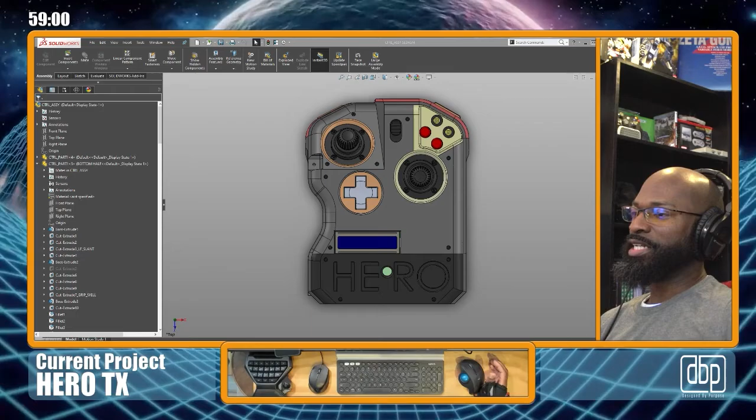Yep, so I'm back at it again. I did some more work over the weekend. Just so you know, if this is your first time, I am an engineer, and I am creating my own custom radio for robotics, remote control projects, whatnot. It's my hero radio, so it'll be at least my first version of the hero radio, and it'll be used for a whole lot of things. So the main thing is that I get it built and that I get it in service so that I can actually continue on these other projects.

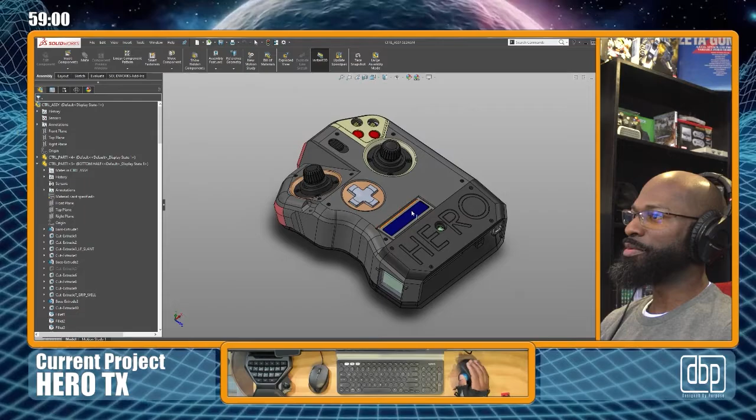So over the weekend, where I left off from my last stream, I asked if you can see some of the differences that I've done since the last stream from Friday. Can you spot the differences? If you cannot, I'll point some of them out. I added the bottom plate, the bottom faceplate.

Oh yeah, a couple differences I forgot. Actually, there's quite a few things I changed or added. So I added the bottom faceplate on here, and you can see I've typed in the first version of my hero, just some hero text. I originally was going to put it up here, and I may still do that, but I didn't put those screws in there. I need to move these. I think I'm going to move these holes out to the sides instead of being in line with these holes. But originally I was going to put hero up here. I may still do that.

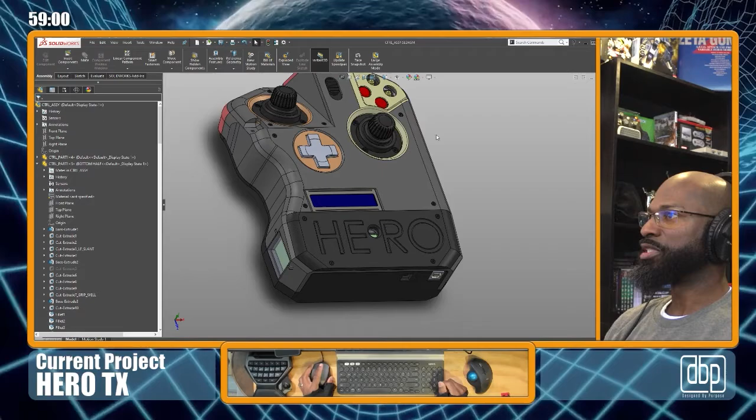But I had all this blank empty space down here that just nothing was happening. So I wanted to put something to kind of break up that emptiness. So, excuse me, I added the text there. So far I'm pretty happy with it. I'm interested to see how it's going to look when it's actually printed. Of course, I can turn off these lines to try to get a little bit of a feel for how it's going to look. So, something along those lines.

Okay, so I have that. What else? Let's go. I added, let's put this back on here. I actually added some screws to the top just so I can start getting a feel for how that's going to look. I'm going to use M2 screws. Originally I was using 4-40s.

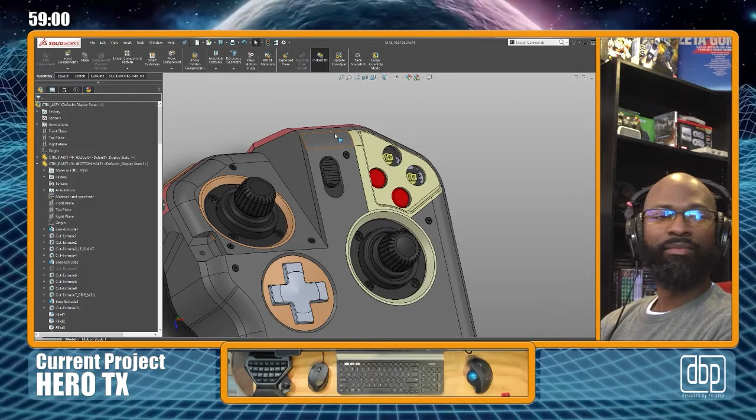I had planned on using 4-40 screws, but because the inserts, the press-fit heated inserts—I don't know what you would call them—were mostly available in metric sizes, I opted to change everything over to metric screws. So I have the heated inserts, and I have the screws already here. So I decided to go with the M2.

I figured they're quite small, and it's not like this is load bearing. These face plates aren't load bearing, so to speak. They just need to be on there. So I thought the M2 would be unobtrusive. I already bought them, so they're black oxide, the dark color. Check, yep, they're black oxide.

I thought about it briefly. I was like, well, maybe I could do just the chrome or the stainless steel look, but I think I want to go with the black oxide. I think I want to keep them black.

So we have that. I went and popped some holes in so you can see the ports on the Arduino Mega. So that's cool.

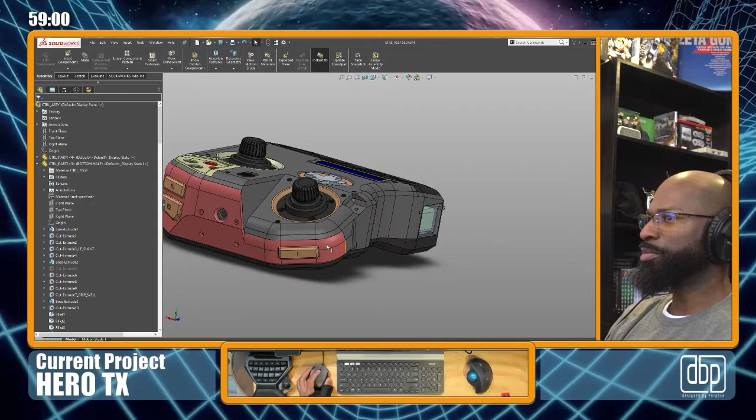What else? I pretty much finalized the buttons, the bumper buttons up here. Well, I shouldn't say finalized, but I made progress. So I scooted them over. I centered them within this face.

I also added a little bit more substantial flange in the back, so it doesn't have just that see-through gap where debris could go into the radio. It is open. There is a little space on this side. I'm still trying to figure out exactly how I want to deal with that.

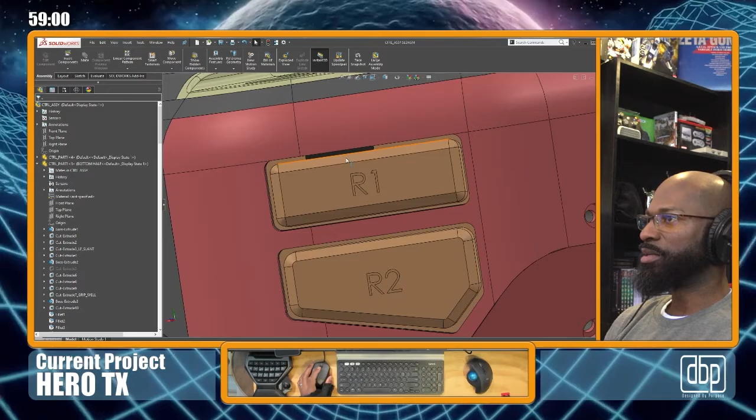But right now, this is what I've done. So this one also has a flange. The flange encompasses more, it fills in that gap. Same thing here. This is actually a button that's out of place, so you can see how that goes now.

I did say that I was going to keep this lip. Originally I was going to get rid of it, but I'm going to keep it kind of as a finger guide. So I think I'll leave that there.

That's no problem. So I'm supposed to be working on this battery box and getting this finalized. I'm still, in my mind, working through it. I do know that I'm probably going to turn this up on its side instead of having it lay flat. So I can do that real quick.

Because I'm more than likely, for the battery box, I was trying to see if there's any mates. There's no mates. I'm more than likely going to make an insert that goes into this area that's going to intrude upon the top main body and the bottom second portion.

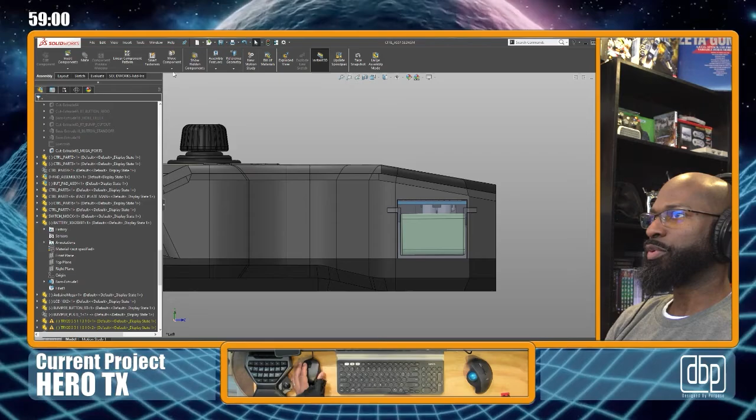So it's going to be a separate 3D printed part. I'm not sure if I'll change colors or not. I may think of it more like a window frame. So I may keep it in the same color, print out of the same material, and then make the actual door or box out of a different material.

Uh-oh, it stopped moving for a second. Let's see here.

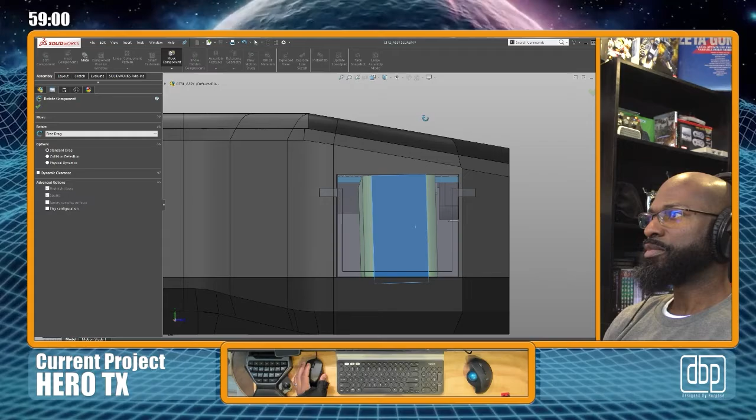All right, let's bring this down a little bit. I don't know, maybe I'm having some memory issues or something, because my Solidworks keeps slowing down a little bit.

But like I said, I have a lot going on. I'm streaming, I'm recording. So let's try to get this. All right.

So I'm probably going to leave it in that configuration, or orientation is the better word to use. Let me close this.

Let me turn this transparency back on. So this door will be... I might just turn it back off. Make it transparent. So that door is going to be reconfigured.

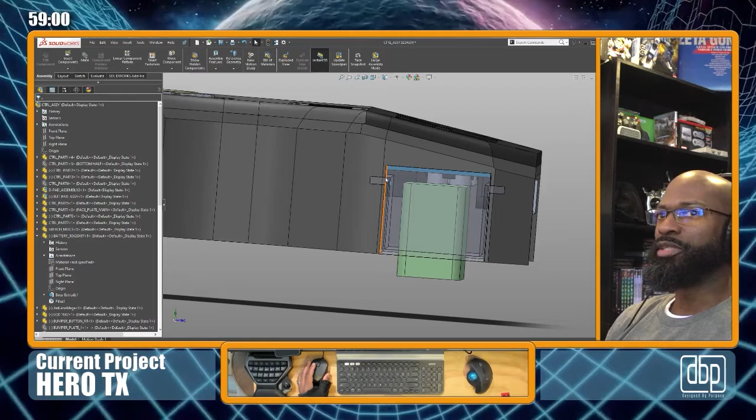So to recap on this, I'm going to make a window frame, a door frame. There's a separate piece that will be mated and glued into the first main body. I'll do that, and then the actual battery holder itself will mate with that window piece.

That's what I'm thinking. That window piece will extend down. It'll be glued on the top portion. It will just be some kind of mating surface, a mating frame on the bottom portion that the bottom piece can go into.

So that's what I have in mind right now. We'll see if that changes anymore between now and actual implementation.

All right, with that being said, today I want to actually make a part, at least make a stand-in for a particular part. Let me show it to you. Let me show you the part.

And then we'll, where's my magic notebook? Oh no, I didn't bring it around. Uh-oh. Delinquent. Let me show you the part while I go get the magic notebook. All right, I'll be right back.

Turns out I didn't have to go far at all. The magic notebook was right around the corner.

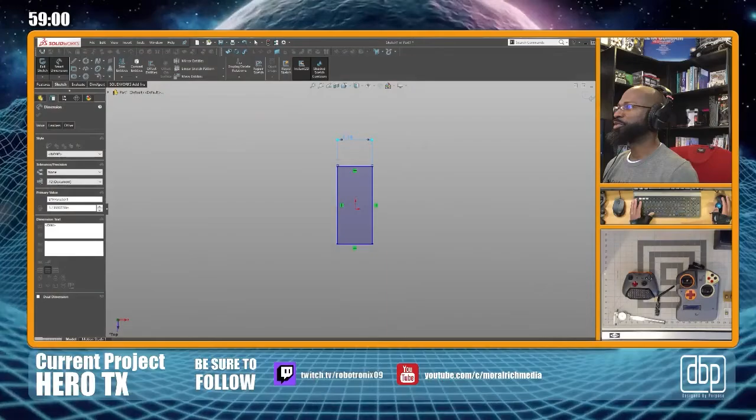So this is 0.6. Oh, got to remember to switch my view. All right, so we're back. This is 0.6 wide, and then it's going to be 1.6 in length. I don't know why there's a delay, probably because I'm running so much in the background. All right, let's just go ahead and center this thing up. Midpoint, and select our little... there we go. Bam, that's cool, all right.

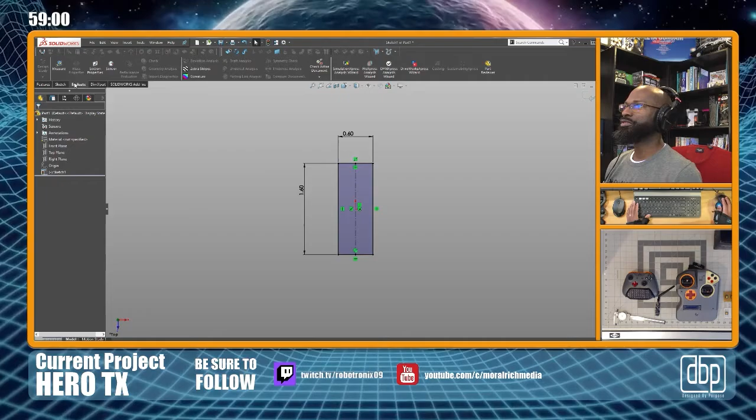So now let's just go and extrude. Oops. And we said, oh, I said 0.4. So I'm going to do midpoint, which I always do, 0.4. So we got our little wafer PCB board.

I'm actually going to make that... well, I'll change it later. All right, I know we're going to have... I'm just going to bring

the calipers over here to where I am, so I can measure this. Let's just get the dimension, the distance. Oops. Roughly from the standoff. I think you guys can see it. Yeah, you can kind of see me measuring over my keyboard.

0.04. Oh, no, 0.44. Yeah, it's almost like 440. So let's just make this. Let's see if I can find that gesture again. Oh, so I do have a gesture coming down. Just grab that. I need to get my center line tool.

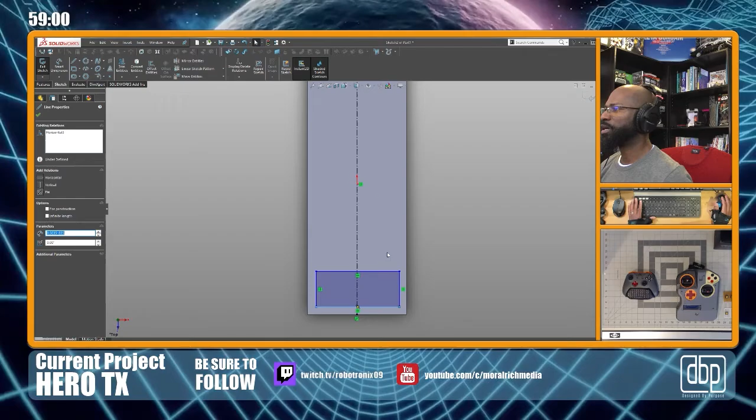So now that I'm doing more regular work with SolidWorks, through this process of these streams, I plan on streamlining the workflow, you know, knowing which gesture is where.

Now this doesn't matter, I don't think. Knowing where it is, being familiar with my little hotkeys and setting them up, you know.

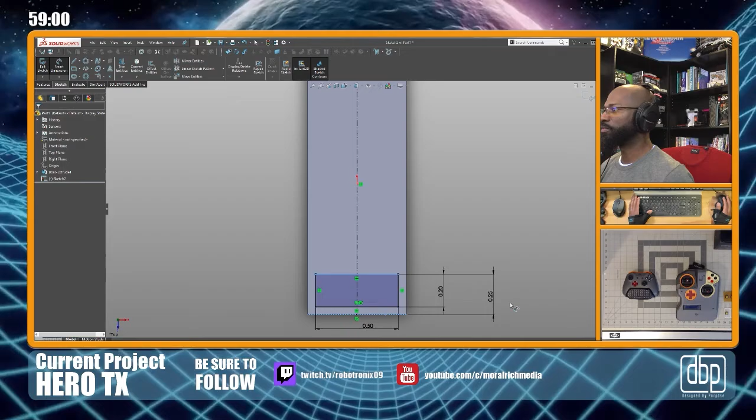Oh, get rid of that. All right, that's cool, we don't really need that. I'll just set this 5. All right, let's get our extrusion going. I said 0.44. All right, just a little bit over 7/16. Okay, so we got that.

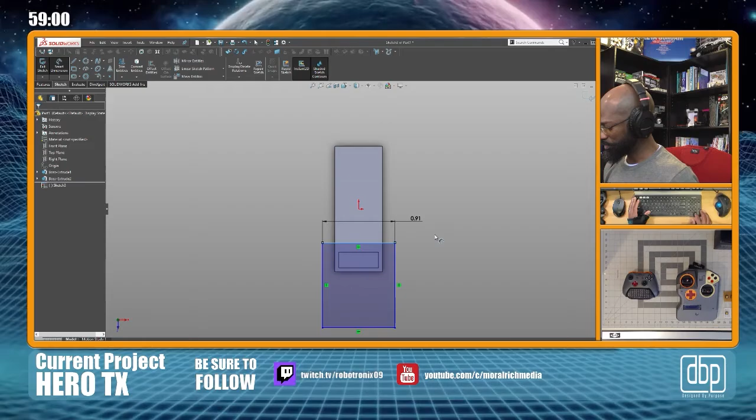Now let's get the width on this thicker. We're just under 3/4 of an inch, 0.732 roughly. All right, so we're gonna go normal to that. I am going to start a new sketch, using my gesture button. And I'm going to pull this out. 1, 2. Bam, all right, 732, we'll just do that.

That's fine, center that up. Come here, give me that midpoint. Snap to the center line. All right, we got that. Now let's see what our length is. It'll be cool, then at least I'll have a space holder, a moderately accurate space holder. We're looking at a little bit over 1 1/8.

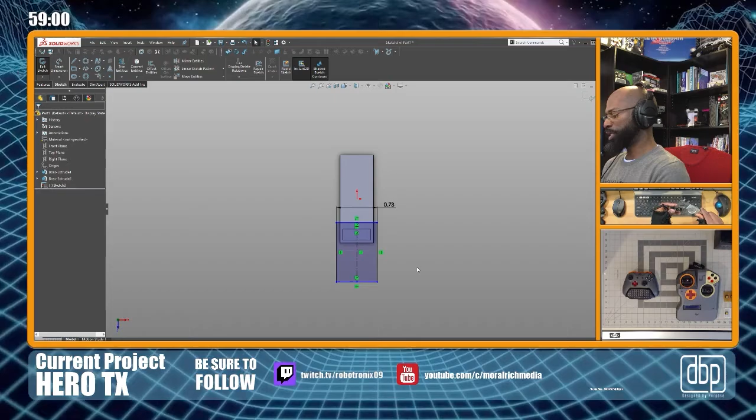So let's say 1 point... oh no, not 1 1/8. 1.032. All right. 1.032.

All righty, now let's just get this overall length. What is the overall length from the top of this? Let's see if we can get that. I notice as I've gotten older, because I've been staring at these computer screens, I cannot see things up close anymore. 2... I'll just make it 2.3, we'll round it, 2.3. All right, not too bad.

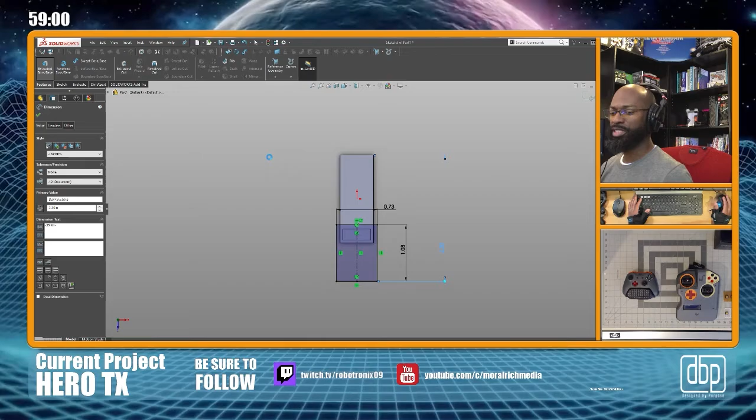Okay, oops, all right, so now I need to extrude it. I will do the same. Oh, how thick was it again? Oh, it was just under... that was weird.

Okay, this is actually a little more than 1/16 of an inch, so 0.065. All right, let's see what we got. Yes, sir.

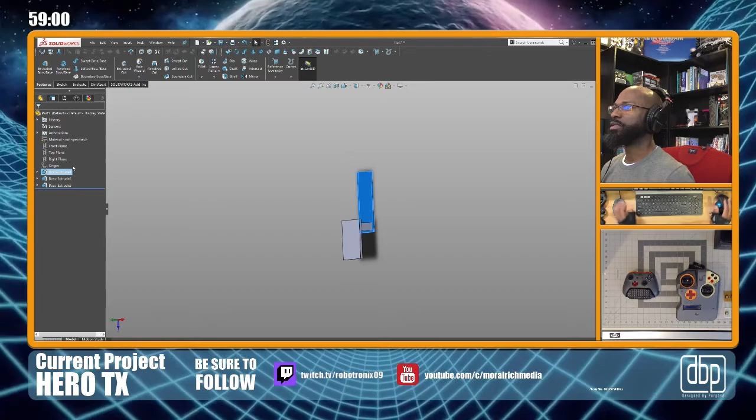Okay, let's add a little color to this thing. Let's see here, get this one. Switch hands, I think it's the angle I was holding the mouse, it just doesn't feel good. Like I said, I bought my Logitech with all the hopes of never having sore wrists, but it didn't work out the way I wanted it to.

Okay, let's see here. I still need some lessons on this whole color part. I use it, but it's like, do I understand it fully? Do I understand the parameters the way they're supposed to be?

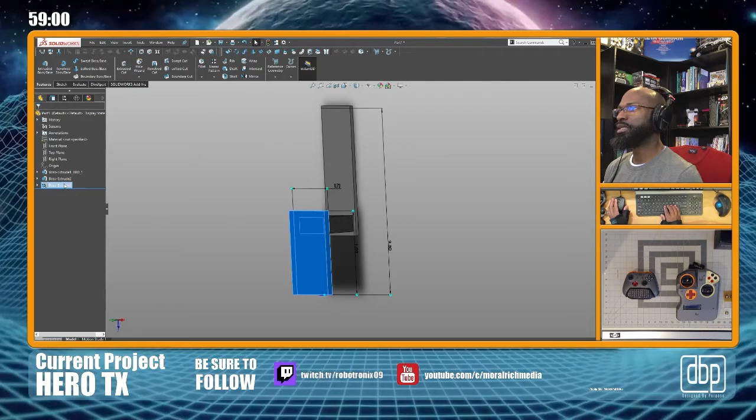Let's just give this a name. I'm gonna say underscore BRD1, underscore BRD2. Now, should I just side note, should I be more descriptive in those things? Let's just call this connector, I'm gonna say CON, C-O-N. Okay, all right, so let's save this.

I didn't even make it as an assembly, I just made it all one part.

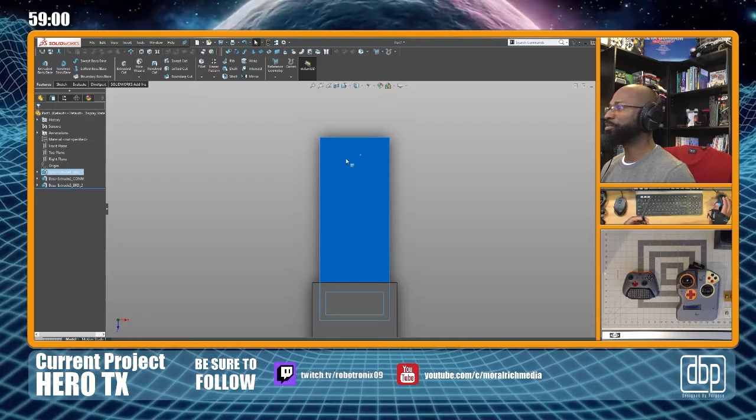Let's add the actual antenna. Now, like I said, if you're doing something and you need a placeholder, or you don't have the actual model but need something, like a mock version of it, then I'm all about doing this.

Now, granted, if the actual model was available on GrabCAD, if I saw it, I would definitely use it. I would definitely suggest doing that, but I just figured 0.235 in this situation. Just make those equal, this would be the way to go, just to model it real quick.

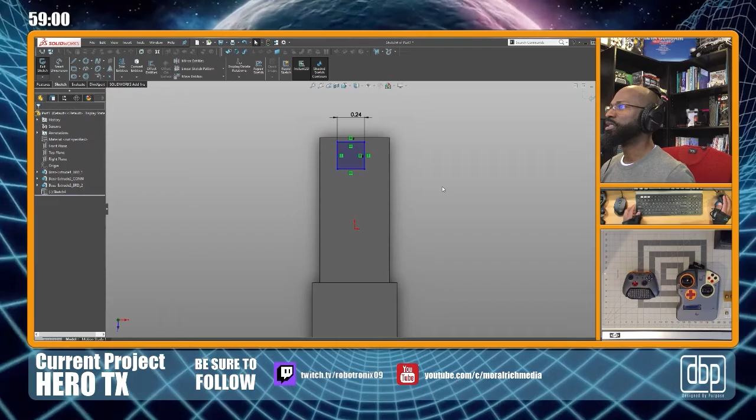So that's what we're doing. But this will allow me to at least have that in the model as a placeholder. All right, it's the midpoint.

Ideally, man, I really want to get to where I CAD model like a touch typist. That's what I would want, that would be my ultimate way of doing this.

I'm just gonna make that at 3. You see the beauty of doing the mouse with the left hand and having your other hand on the number pad? I wouldn't have to take it off. Let's see here, let's make this 355, that's fine.

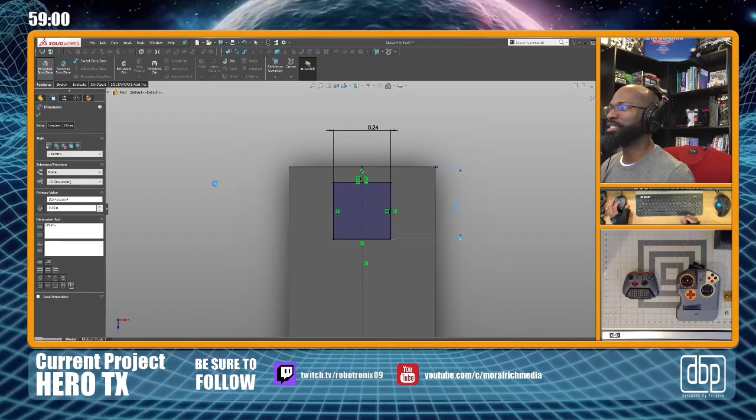And of course, I'm designing this with enough wiggle room that I don't have to have an exact model. So this isn't necessary to be exact, 0.355. Is that right? 0.355. For people who are new to this process, so they understand why I'm doing it that way, why I'm not making it totally exact.

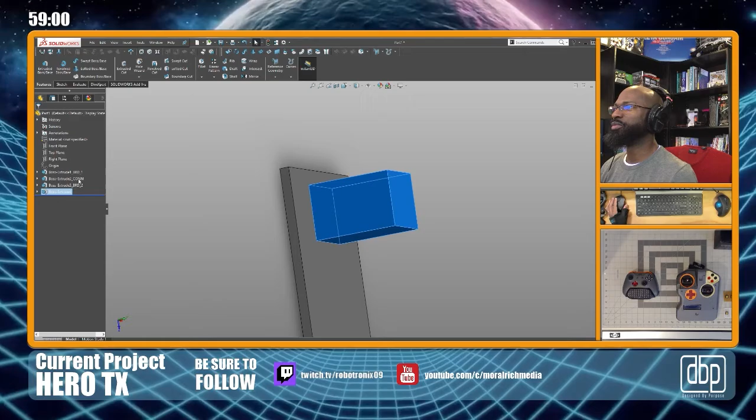Mainly because in this representation it doesn't matter as much, because I'm designing it with enough wiggle room that if it's not exact 100% - oops, I grabbed that face, that was wrong - that it's not going to be a deal breaker. So yeah, that's what it is.

And I try to use that in many designs where it's like, okay, let me just give myself some extra. And then also the thought is, after I make the first one, I can see where this little part right here actually needs to be a little bit more precise. You know what I'm saying? I can see where I need to tighten up a little bit, and I'm okay with doing it that way.

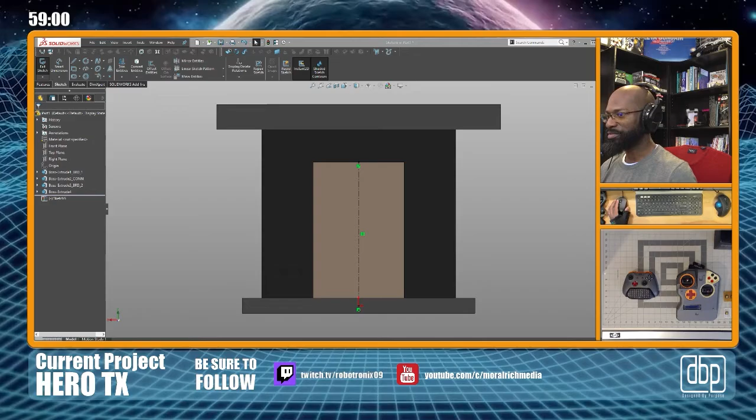All right, make sure everything - oh, I did not hit the timer as usual. I need a non-hit-timer jar, so every time I don't hit it I keep track. It's 20 minutes late. Just can't seem to hit that timer. So now I got a timer on my screen that's just not going anywhere.

Let me get a swig of this juice, this clear juice. All right, back to this, let me get a... uh-oh. All right.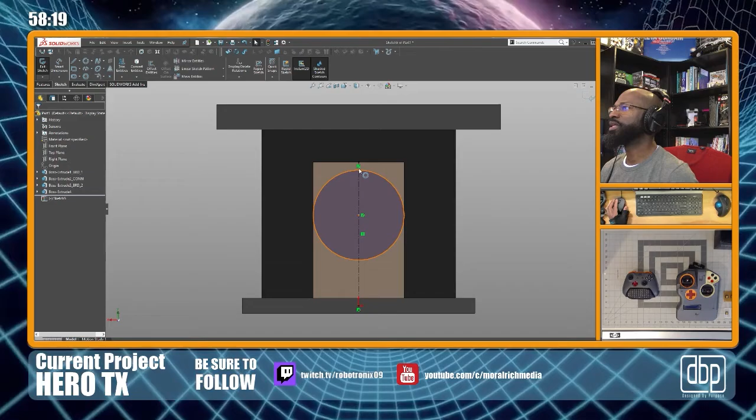That works, let's just slide this down a little bit. Now, I know in AutoCAD I can just do like a quadrant there, and here in SolidWorks, I think you can add the little point and then move the point to that. Yes.

Let's just give it some. All right, I'm going to extrude it out a little bit. Let's see here.

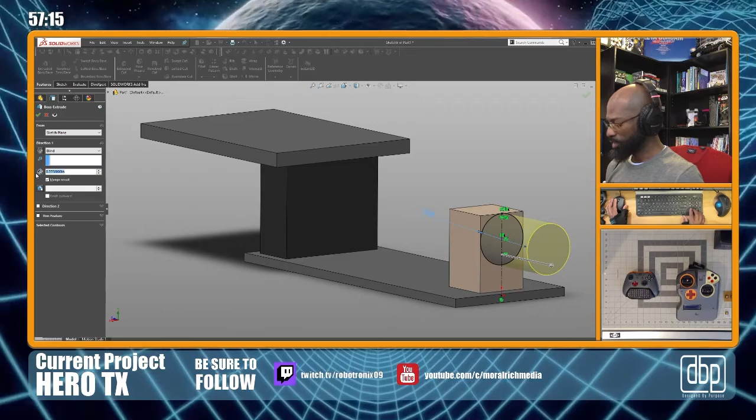0.147. All right, let's see what we got. Come on. 0.147. 0.147. All right.

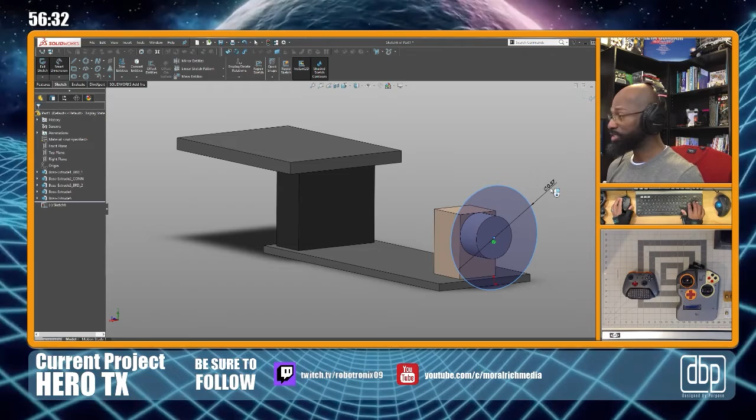Now let's get the big circle. I'm actually going to put the antenna in. Let's see here. You could say 0.397. I think I've seen that somewhere else. Sketch, get the circle, get in the center of... oops, there we go. Smart dimension. Come on, show me up. 0.397. We got it. Man, that don't look right.

That does not look right. Let's see here. Maybe... nah, I think it is right. 0.397. No, it's right. Let's just give that. 0.8125. Come on, baby.

Actually, gonna have the antenna in here. 0.8125. How are we doing out there?

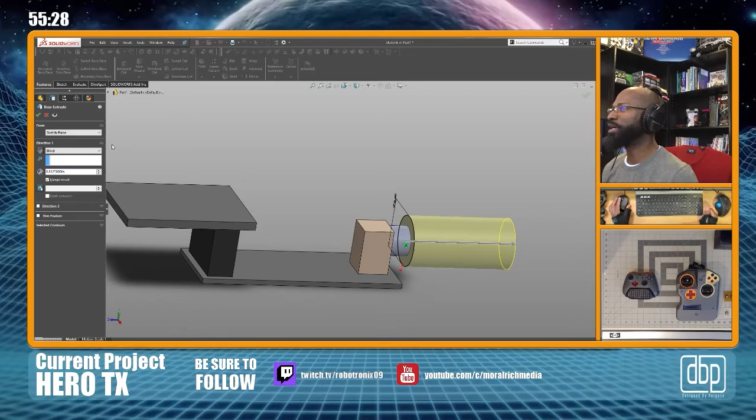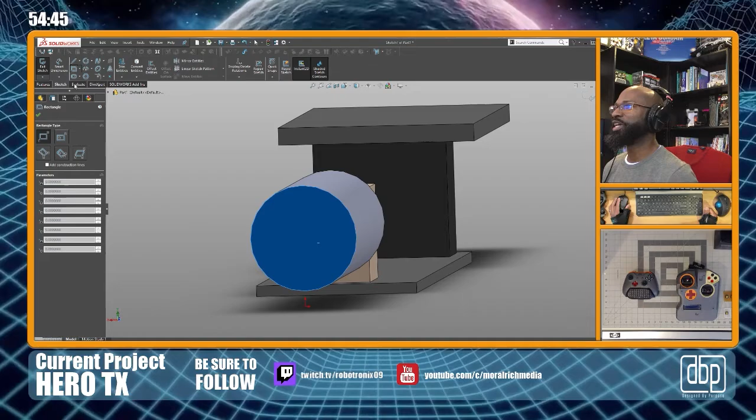Things like that. Some other topics I'd like to add to talk about, you know, as designers, as engineers. I hope the channel fills up with people who have an interest in that, who design in their own right, whether that be on the product design side or on a more not consumer facing, more industrial side. However, you know, this is all about the joy of designing.

All right, the expressions, how you express yourself through your designs, where you can, because depending on what you're doing, you may not be able to. It may need to be clearly functional. I mean, I guess you always express yourself some kind of way, right? Even if I'm making something that's really just functional, is it gonna be sleek functional, or is it gonna be over engineered functional?

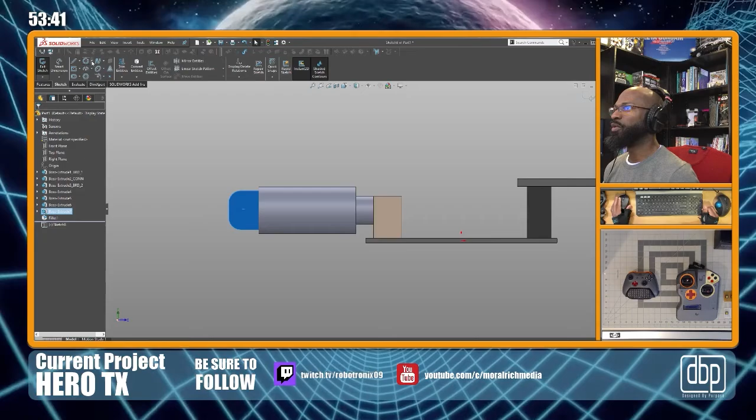Because I've seen both, where you use the largest pieces of raw material that are possible, right? Whereas instead of using the least, I mean, for me, I've always been a person, whenever I'm designing something, I'm kind of minimalist in a way, you know, or I like things that are small and dense.

You'll see that as I go along, when I get to doing the robots, building robot platforms and stuff, like I said, majority of the platforms I build or try to build, I try to make them small and utilize all the space that I have. So I try anyways, I don't always succeed, but I try.

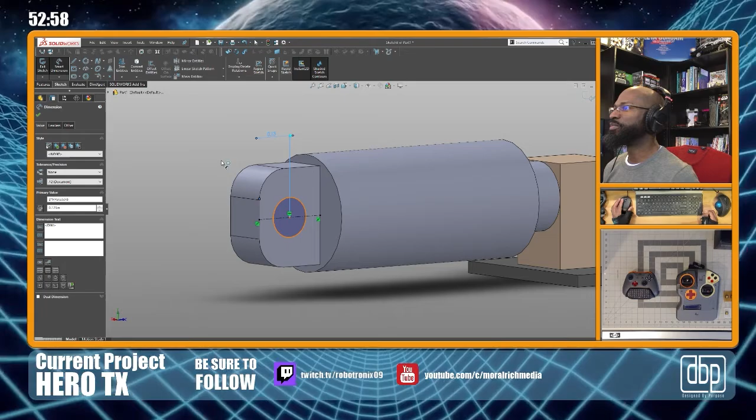Let's see, this is really unnecessary, but I'm doing it, so let's just go ahead and finish it up. In case I want to pose an antenna, let's see how easily I can do this. Come on, what happened? Why did that not? What did I miss? Oh, it wasn't on there. Okay, shoot.

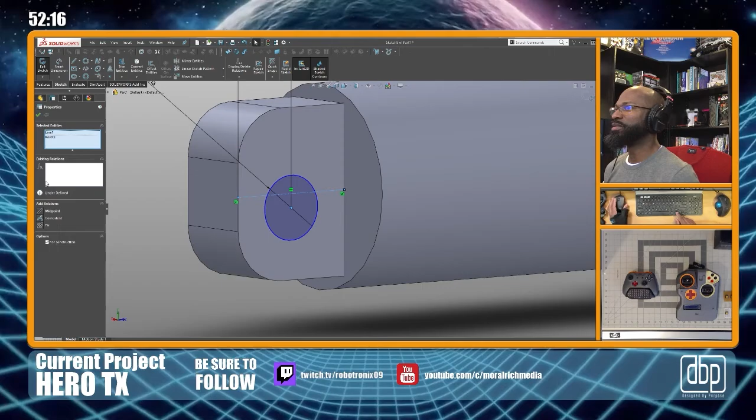Oh, it's trying to get on the midpoint. One thing about parametric modeling and stuff is learning the language, being able to understand when it's telling you the error, understand what it's talking about. Understand, oh, well, it's trying to snap to this and you need to not do that, or you have it defined in all these dimensions, you need to just be cognizant of that. I mean, that's some serious stuff.

All right, I'm gonna go ahead and insert this in. I don't necessarily need to do the other part at the moment. Come on, let's get these. That's gonna say... thought I was on the whole body. That'll stay. Let's finish this up, keep it moving.

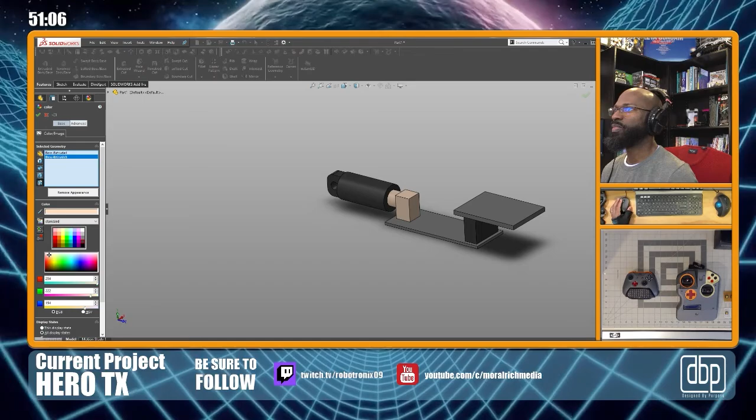Can I add? Yeah, that worked. Okay, I do like intuitive. Hey, ooh, I know, a couple of things.

I'm trying to figure out what this new... I've seen this CAD software that they use on these tablets with the little pen. I haven't seen it yet, I mean I haven't actually traced down and figured out exactly what it is. But I had an idea for that myself, but I couldn't develop the software yet.

What is this? Antenna mock. Let's just say antenna, let's say ant mock. Let's just do that. All right, let's bring this in.

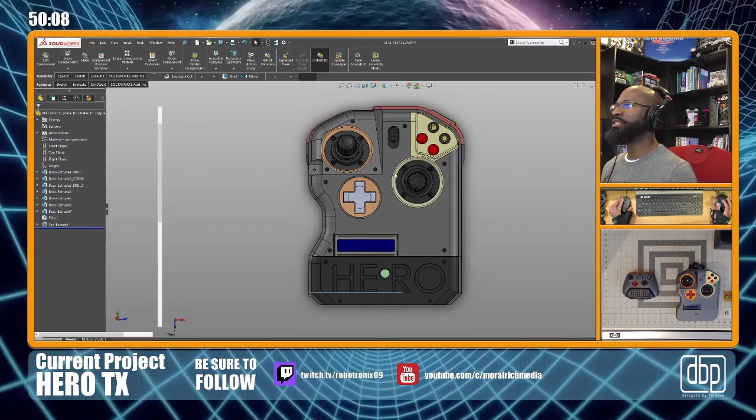So for those of you on Twitch, if you're checking this out, or if you're on LinkedIn and you're a fan of gaming, Valve is the company, and Steam is the platform for playing games on your computer, PC. They have something called the Steam Deck, and basically, you can think of it like a Nintendo Switch for your computer games.

I just found out a couple days ago that Steam Deck is due to be released, I think at the end of this month, or maybe in a couple months. My facts are all messed up, I'll look it up, but it's not out yet. There's still anticipation for it and everybody wants to get their hands on it. It's not out yet, but in the meantime, Steam released something I'll find the link for.

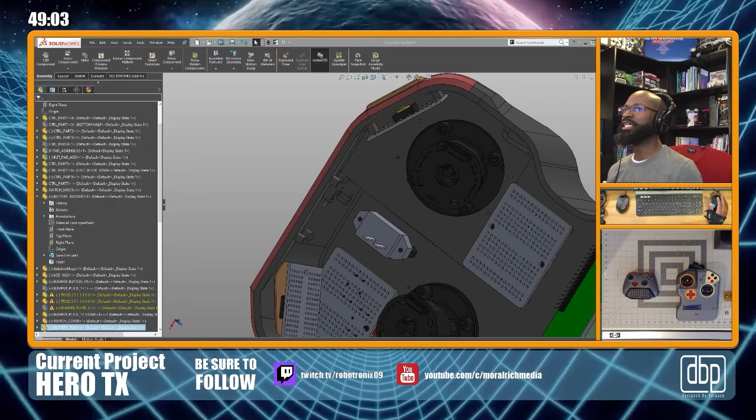Steam has actually released the CAD models to the Steam Deck. No, it's just the outside CAD models. Let me see. Yeah, it's just the outside CAD models. I'm going to put this in the chat.

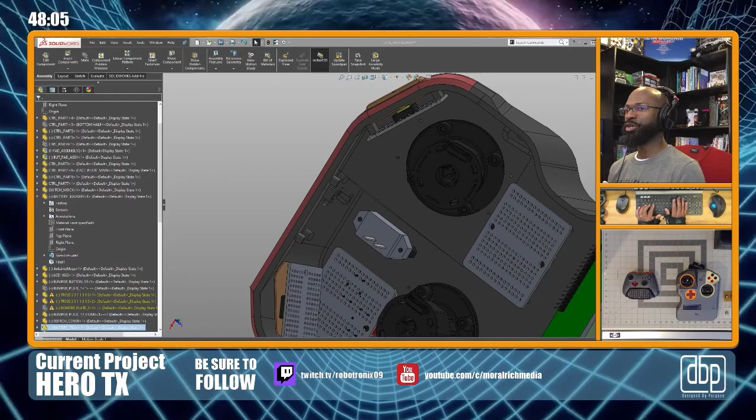So you can download the CAD models, the Steam Deck CAD files, and you can 3D print an accurate size representation of the piece of hardware before it comes out, which I thought was pretty neat. I need to find out how many other companies release CAD files of their products, because they said they want the community to start making aftermarket things for it with the Steam Deck CAD files. So it was a release, I was gonna say a press release.

I'm reading what's on the link I put in the chat. It says, 'Hello, good news for all tinkerers, modders, accessory manufacturers, or folks who just want to 3D print a Steam Deck to see how it feels. Today we're making CAD files for the external shell surface topology of the Steam Deck available to download under the Creative Commons license. This includes the step models, the STL models, and drawings for your reference.' So yeah, I thought that was really cool.

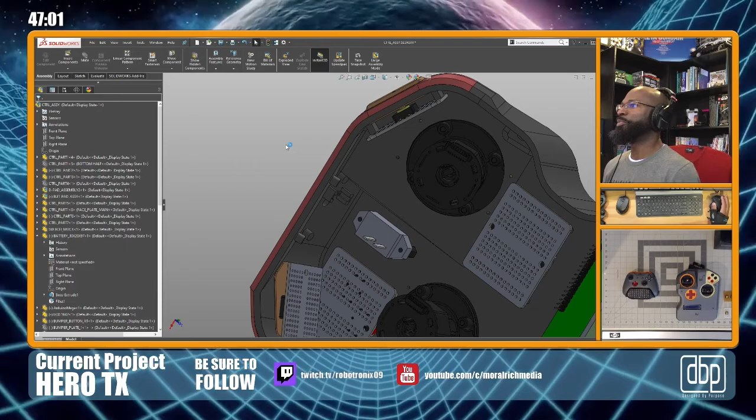I'll pull up the model I downloaded yesterday. Open recent, Steam Deck. Maybe that's a very common practice and I just wasn't aware of it, but nevertheless it's really cool. I'm debating whether I want to print one out. I think I got right now the actual model, let's see if it pulls up. Excuse me.

I actually made a mistake, no I don't want to do that. I made the mistake of doing the feature recognition. It was like, oh, you didn't need to do that. There was no reason to do that. So it took a long time.

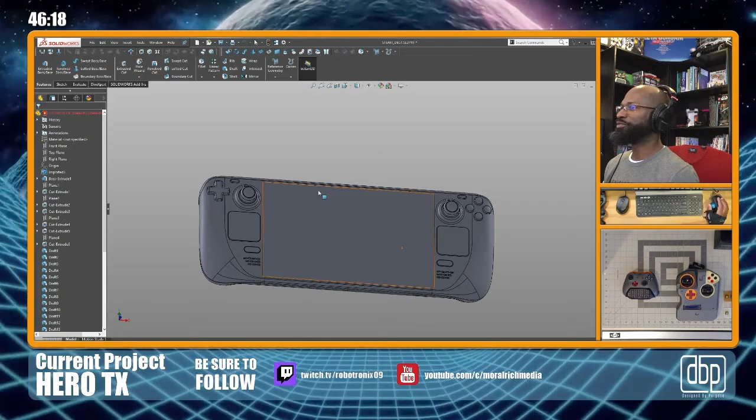But yeah, like I said, being that I'm into control surfaces, this was really exciting for me. So I can really look at how they did theirs and get an idea of how this is done in industry, in a large scale consumer device, and get a feel from that. You can see the gap they had, look at the gap between their buttons.

Oh, actually that's probably not true. It's actually, the case goes underneath the button more than likely. Yeah, it just comes down, but the gap actually between the button and the case is probably a lot smaller than that. So this is just a feature where it has like a gully.

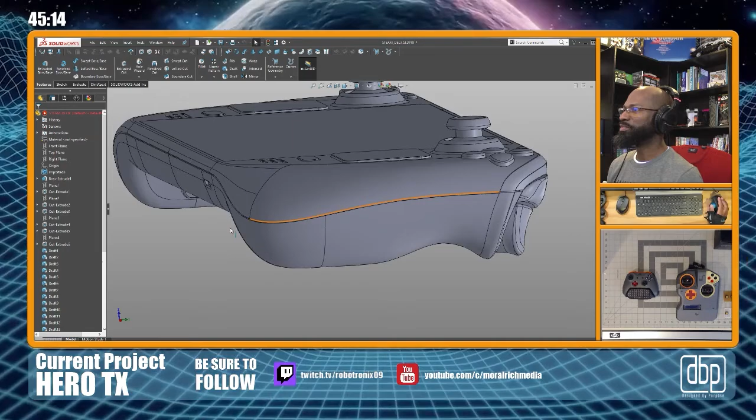So with that being said, I'll go back on mine and say, okay, I was gonna make it closer anyway, but maybe I'll make it so they overlap. Also, the parting seam between the two, I had planned on doing that with mine, because currently with the radio there's no parting seam. Granted, that's not even showing, let me show you the bottom. Put the bottom half back on.

So as it stands right now, there is no parting seam, but there will be one. I will back that up a little bit. I mean, do you have to have one? Technically, I guess I don't.

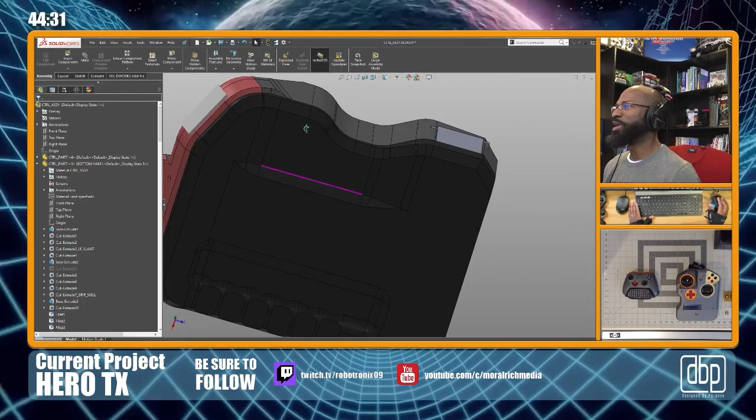But I do want to make sure I make these two halves properly, and that I have something that automatically aligns them, so putting screws in there is an easier task. So I haven't made the screw holes on the bottom yet, I haven't even done the screw hole. I haven't made all the bosses on the top part yet either. So I still got a lot of work to do.

Let me change this to transparent. Let's insert this antenna.

All right, I'm gonna go to insert. Let me make sure you guys can still see what I'm doing.

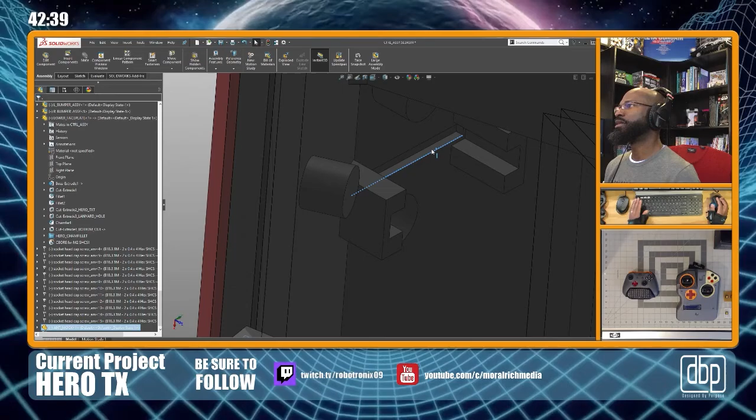All right, so let's do this, let's make this face with... oh man, I missed it. I guess it didn't really matter. I could... yep, make this right here. I'm going to just make it parallel. Come on, SOLIDWORKS, don't stop on me now.

Matter of fact, I've been doing all this time and I hadn't hit save. I'm cruising for a bruising, bruh. Cruising for a bruising, I don't want to do that.

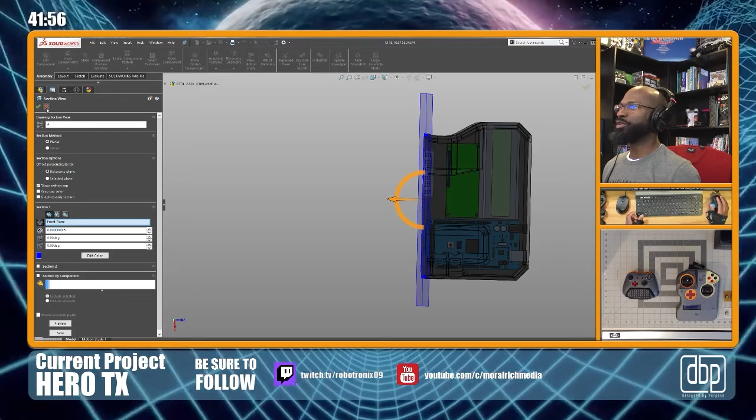All right, how am I going to do this? I need to do something different. Let's give me a section. No, let's flip this over. No, that's not what I want. Flip. Now let's see if I can place it. Okay, let's pull this down a little bit. Come on, respond.

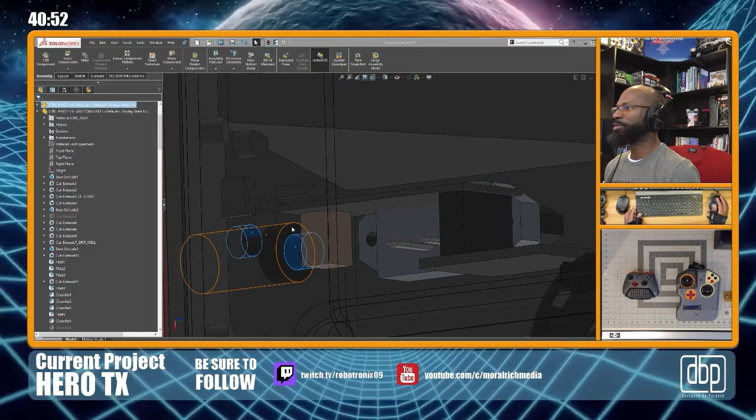Okay, let's do this. Yep, we got those. So I made a little feature in the main body that's supposed to just kind of encapsulate that PCB board. The actual SMA connector, I believe that's correct, that actually is what's holding it. So I might have to check the diameters on these.

Okay, that's kind of looking... all right, now, well, let's do it this way. Slide this back. I'm gonna click this face. I'm gonna run it straight here. All right, let's see how that came out.

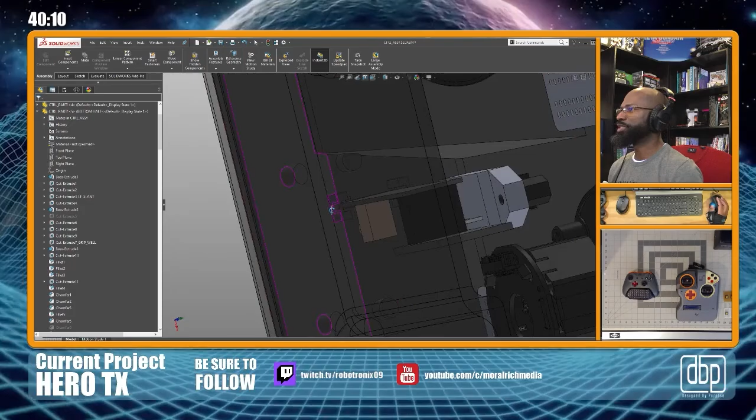Okay, so yeah, I got plenty of little wiggle room if there's any solder things. Now I did not give myself enough on this outside bumper, this plate. So let me go back and fix that.

I don't really want the antennas... well, I mean, it's not that far. I was like, I don't really want the antenna to stick out that far. I do like how the Spectrum radios did their antennas - if I'm not mistaken, there was just the little short, kind of like a nub. I like that. But I also noticed on the DJIs, I'm not sure if it's the DJI or the FlySkies, they have the T-bar antenna. So, I guess really what matters is how well the transmission goes.

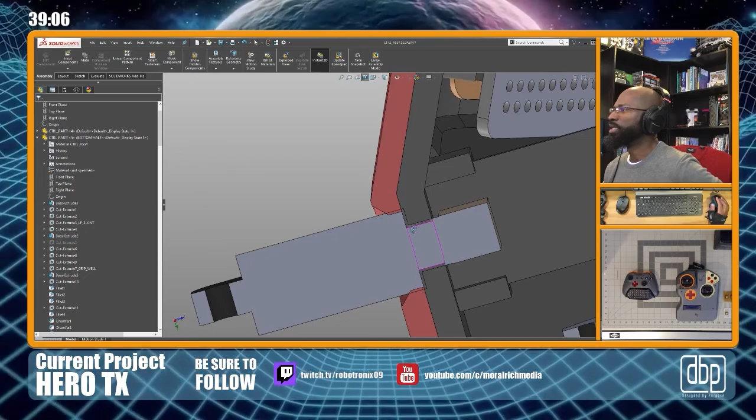Okay, so it looks like I may have been off a little bit. I need to go a little deeper where the antenna sits, because it looks like there may be some interference there. So I'm probably gonna have to open that up a little bit, make it a little deeper, and that's okay, that's not a problem. I probably will leave that. Let's open this up.

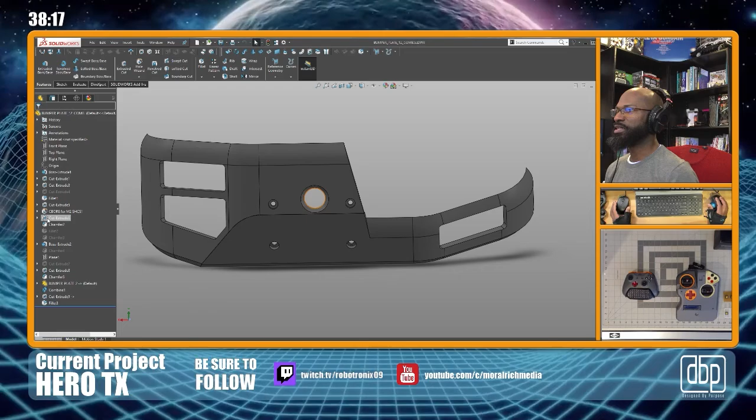Don't you just love designing? It should be pretty cool. Let's go here. All right, let's make it 4, see how that goes. And we'll come around. Hey, that wasn't enough, let's make it a half inch. We can make it a half inch, or we can make it 7/16.

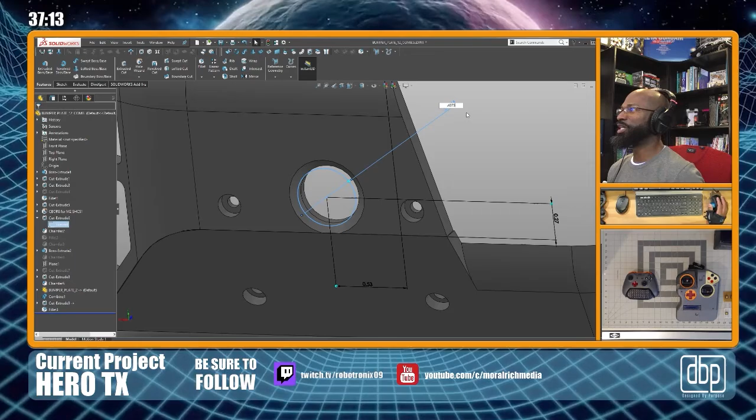How many parts? I wonder how many consumer products, I guess what I want to say is, I wonder how many products you see are like kind of a mix between Imperial and metric. Is there somebody going back behind people checking them, like, hey, why don't you just make that all metric? Granted, you can just convert 7/16 to the metric equivalent, but my thought was, I'm going to pull up the calculator real quick and see - 0.4375.

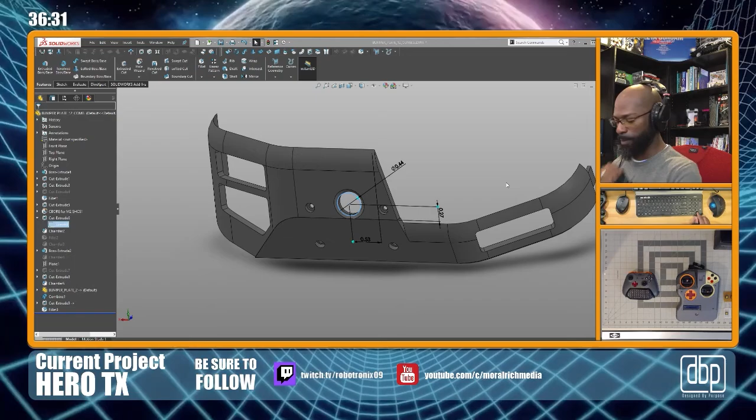So that's 11.1125 millimeters. So it would be like, well, just make that 11.5 millimeters. Okay, 11.5. Well, that makes 45. That doesn't make sense. So let me see, would you leave it at 11.1125 millimeters, or would you just take it up to 12.7 to be a half inch? Or would you just make it 12? Chime in the chat, let me know what you think.

And I think now, because I'm 3D printing it, I may be getting a bad habit, like it doesn't even matter what it is. You can just make it, because I'm not going to go outside and machine it. I don't need a piece of tooling that's going to be some certain dimension, or have to do a boring bar and try to dial it in. I just need it to be big enough, and there's some clearance there.

Again, I'll make this part. I'll go ahead and do it now. Let me make sure that's accurate with what I see here. Let's go, let's go.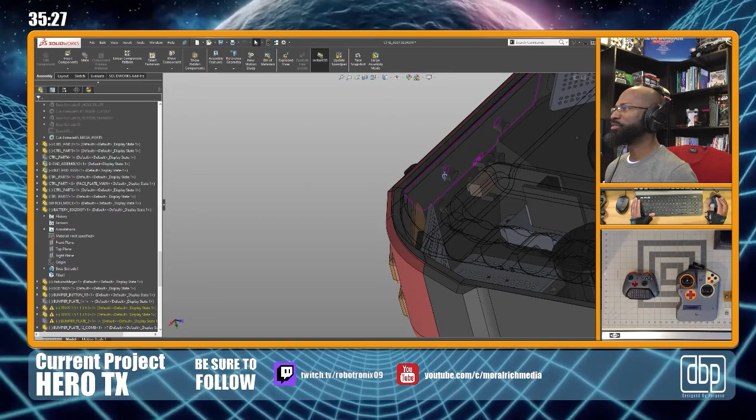You know what, I just realized I didn't even talk about the Super Bowl. Hope everybody, if you're on the chat, if you watched the Super Bowl, did you enjoy it? I didn't see the Super Bowl, I'm not really a football fan like that. But I did stop by to see, well I actually watched on YouTube the halftime show. I am privy to the 90s, but it was all right, it's cool. What did you think? Let's see if I can find this. Did I miss it? The good thing about the stream, if I'm busy, it goes by pretty quick.

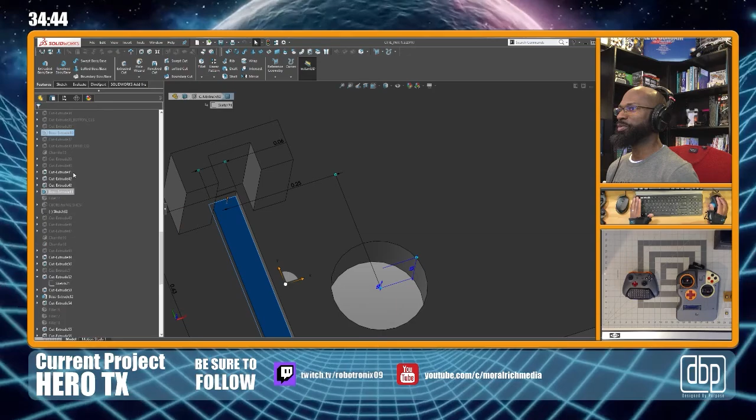And I got some progress done. Kudos to me.

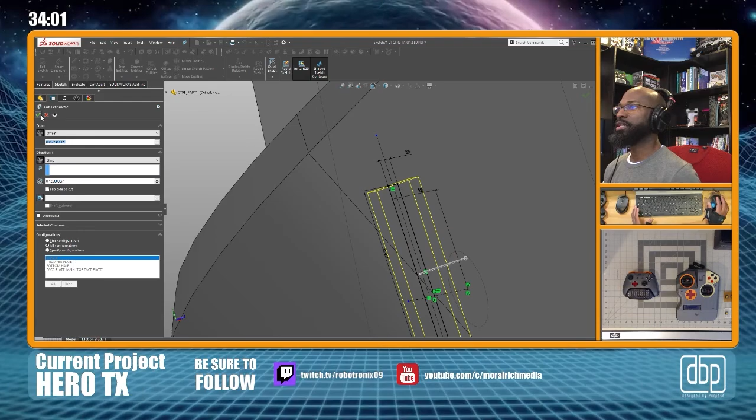Let's see what we got as far as dimension here. Oh, it's an eighth of an inch deep. Wait a second, what? No, it's offset. Okay, what in the world did I do? Okay, I offset it, is it a 32nd? I'm going to make it more, let's put it at a 16th. All right, so let's do that. I think that's going to be enough, roughly about a 16th.

Let's go back to the assembly. Oh boy, all right, so it's playing games again on me, I don't know why it's doing that. It's disappearing, but at least I know what it's doing now, I think. Okay, do that, let's hit save. I mean, you can imagine you do all this work and then all of a sudden now your part disappears and you're like, what happened to it?

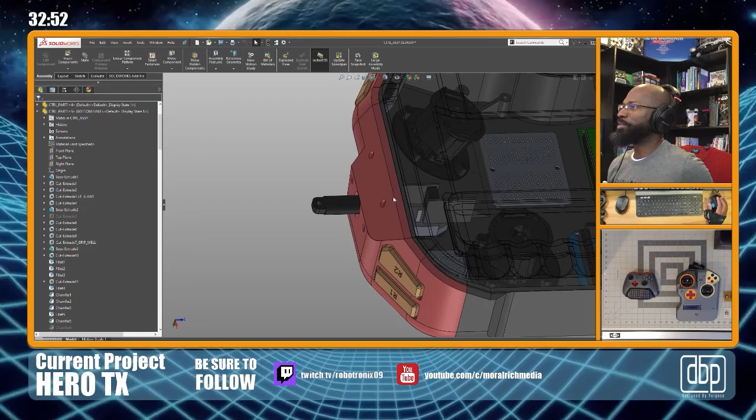So even with that being said, now it would be cool if we were using like a file management system or something, if I was archiving it, so that'd be cool because you can always go back to a previous version as long as you're checking it in and stuff. So I see how that would be very beneficial. So what I did do though, because of that very thing, I went back and saved like a backup copy. I just saved a file out and changed the name and said, okay, I have at least one backup copy that's like 70% done, or it saved me. It made a respawn point of where I'm leaving off.

Okay, so let's see here. So that's good, 1/16 of an inch is plenty. So I got some gap. That hole needs to be a little bit bigger, we'll fix that hole. The main thing, one of the main things I wanted to see is how the space was going to be on the inside with the other components, so I can see how it interacts with the switch and stuff. Let me fix this hole, and that'll be a wrap on that today.

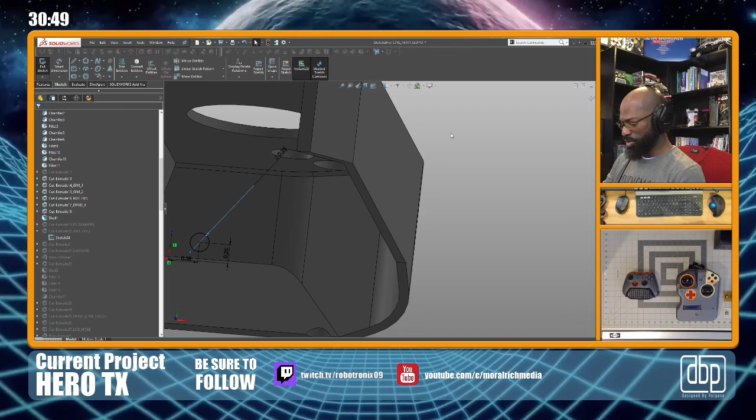Something's wrong here, I might have drawn that wrong. Oh, you know what? I didn't measure it. I need to undo that. I didn't measure it, I'm going to undo it.

I drew that inner piece, that inner diameter little piece on the SMA connector. I just drew it and didn't properly dimension it. So this hole is probably closer to being correct than if I changed it. Okay, cool, I do like this.

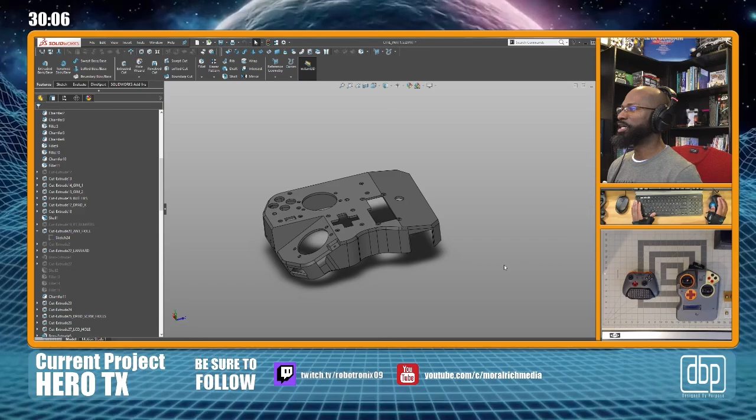I am someone who watches those model building videos on YouTube, like people who build Gunpla, videos of Gundams and stuff, where they take the perfect grade kits or any grade kit really, and they open it, assemble it, and then paint it. They're somewhat long videos, but I really enjoy that stuff. I like the kits.

I'm even thinking about once this is done - it's 12:56 - even though I haven't completed this yet, I already have an idea of how I want to make the next one. So I'm going to finish this one, of course.

But if you look at most new controllers and radios out there, they all have a screen. I've always wanted a screen on this. Even some of my older radios, which I'll show and tell later, they all had a screen for video transmission or whatnot. This has an LCD screen, but it's small - you're not gonna watch any video on this. It's just for configuring the radio, troubleshooting, and all that good stuff.

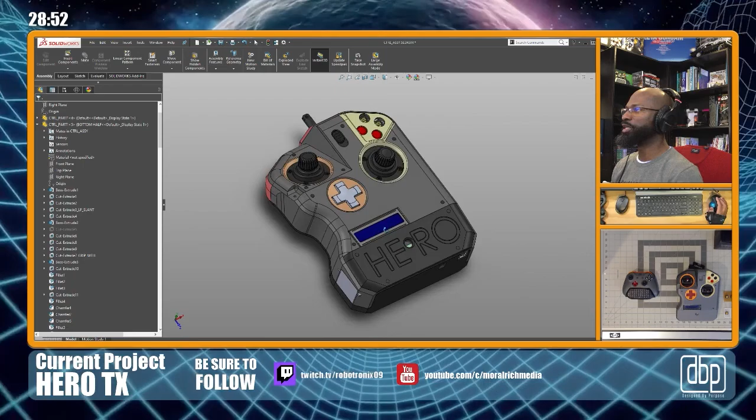But I know I want another one that has an actual full screen you could watch videos on. You know, FPV - well, it wouldn't be traditional FPV, but you could fly by the video. I guess it would still be FPV, you just wouldn't have goggles on.

With this configuration I have right here, I can't see slapping a monitor or screen on this. Originally I was going to put it here, but then your hands are up here, and now you're looking below your hands at this weird angle. That just doesn't seem like it's going to work the way I want.

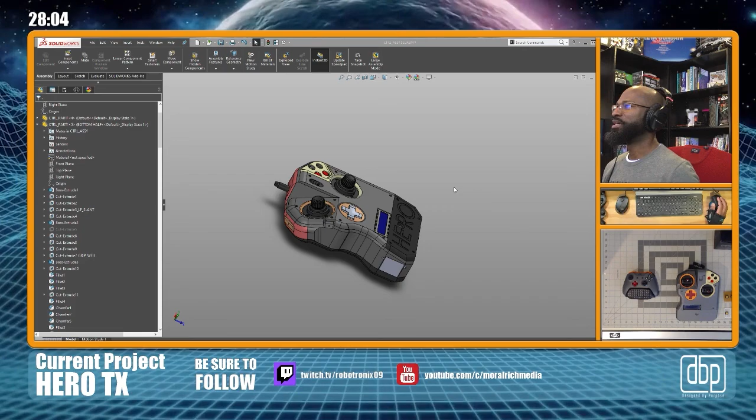But yesterday I had an epiphany, an idea. I was like, oh, you know what I can do? I can do it more like this - I need a radio that has a screen, but I'll arrange it more like this. I've seen radios like that already, but I'll move more in this direction, put my own spin on it. It won't look just like this, but screen in the middle, controls on the side.

But I'll still use the larger gimbals instead of these small thumb ones.

All right, well I hope you guys had a good time today checking out the stream. I appreciate it, and I'm definitely happy I was able to make some more progress. Even though it seemed incremental, I just put in a part, and that's something I don't have to do now.

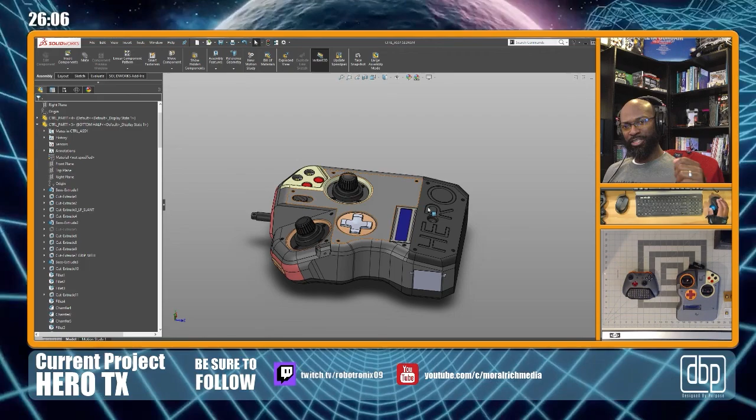Oh wait, I'm still here. Wait, I am still here. I can't leave, I can't leave.

Okay, buttons don't work. Or we can just enjoy the song together.